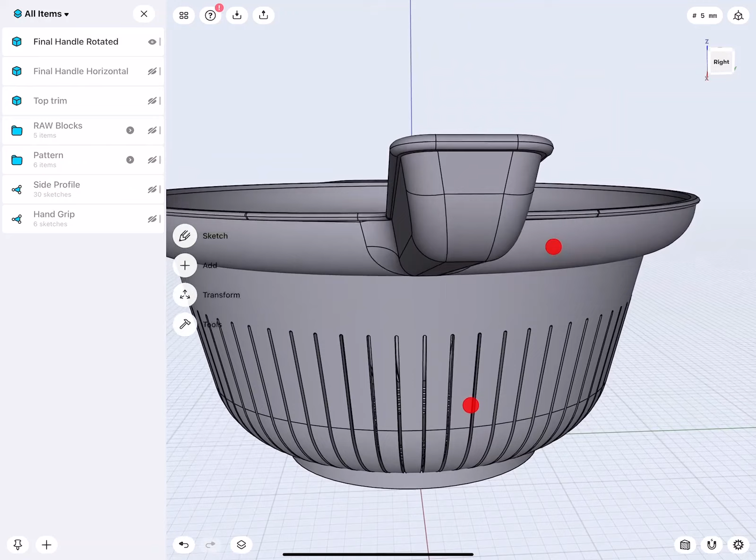Hello everybody and welcome to this tutorial, Advanced Surface Detailing for Strainer with Shapr3D. In this narrated overview, I will show you the process I used to model and style the strainer, with details like all those openings and adding a rim around the edge to stabilize the product. The file is shared, so please download it to better follow this lecture. As always, this session is filled with many interesting sketching and modeling tips and shortcuts. Now let's get started.

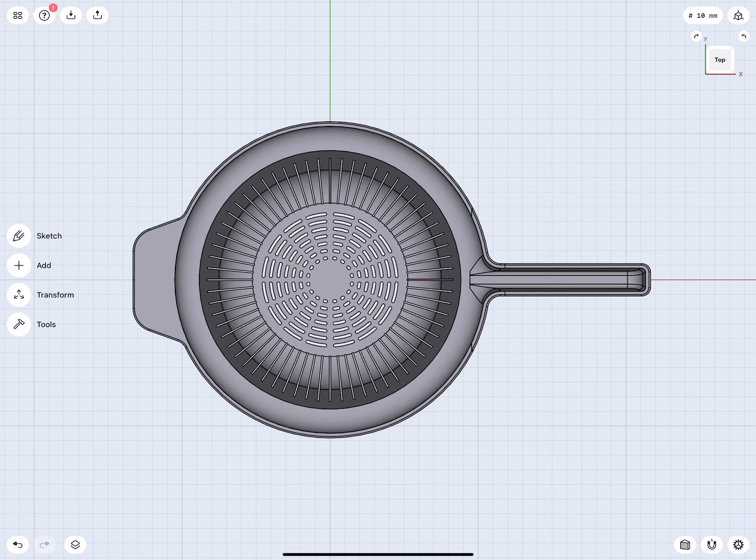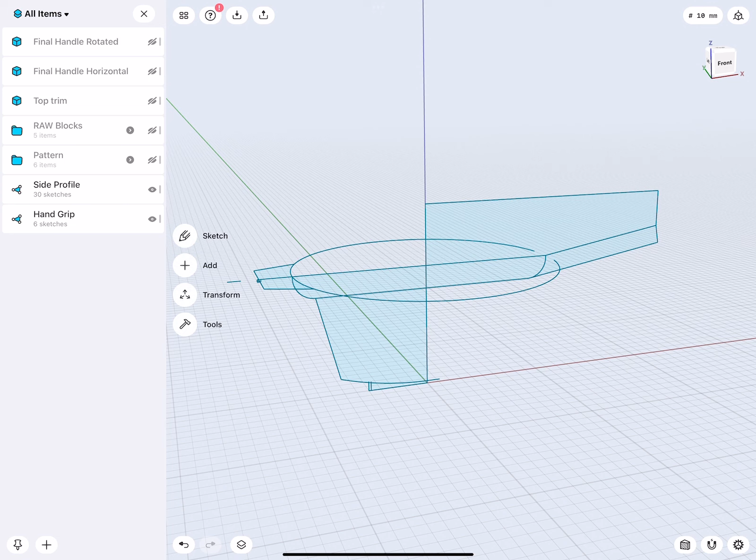Before we continue, because this video primarily focuses on the process I used to model and style the strainer, I'd like to take a moment to talk about how this design is set up. Let's hide this one and turn on these two sketches. Everything you see here is very simplistic, only what you need to model the strainer, because there's no point putting fillets and similar elements into the sketch. You can, but it just slows down and complicates the sketch, since fillets I can easily add as a modeling tool. So in general, I keep my sketches as brutal as possible.

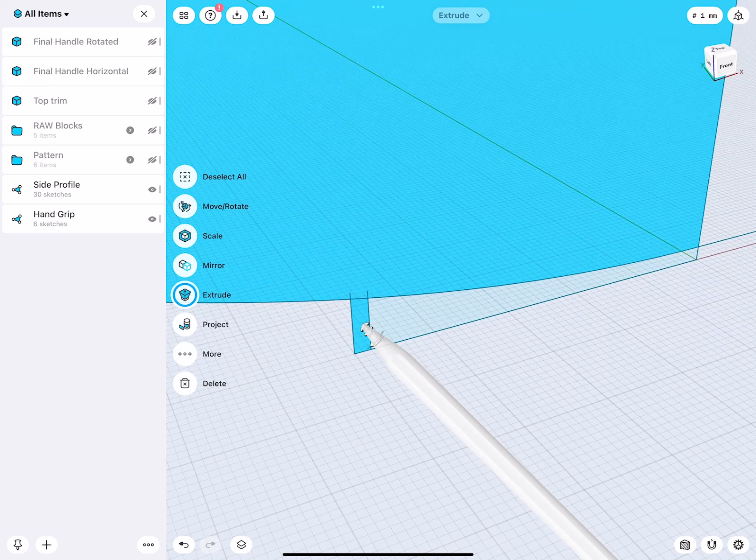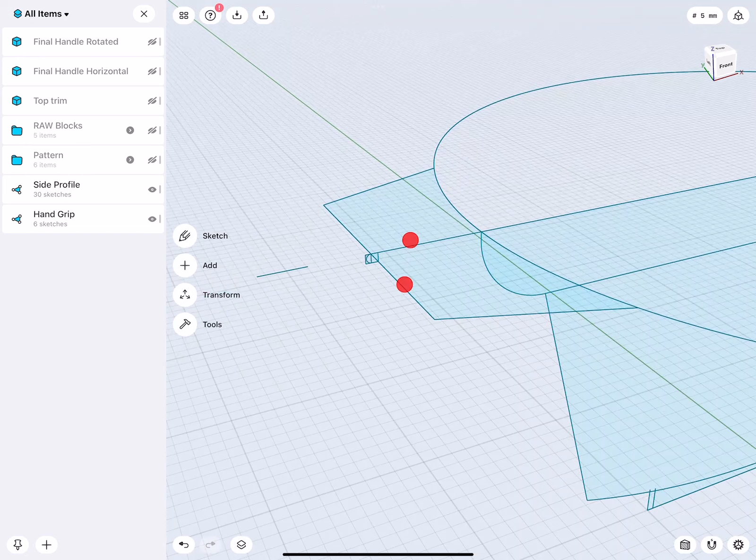You can see there's everything for the strainer, the handle, a horizontal handle, and the base. The base is very loosely sketched, the endpoints are loose, they don't even touch this arc. There's an interesting element here that will be cleanup geometry, which I'll explain. And here is a small sketch used later to detail and create a rim that goes around the strainer.

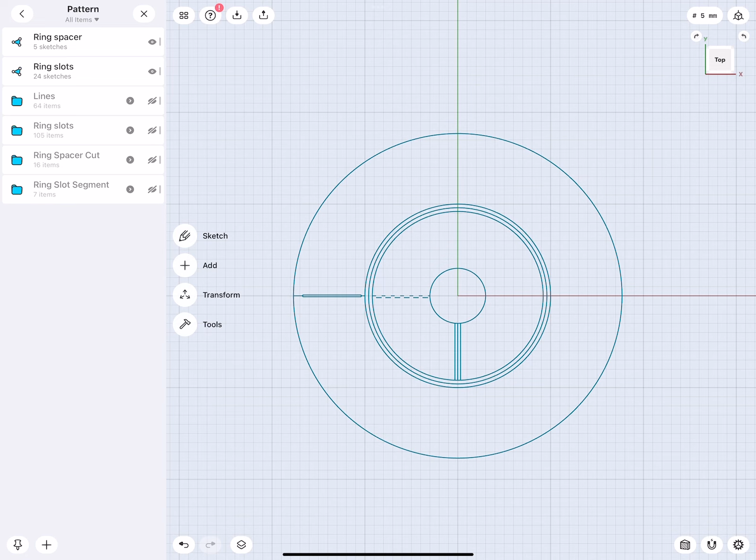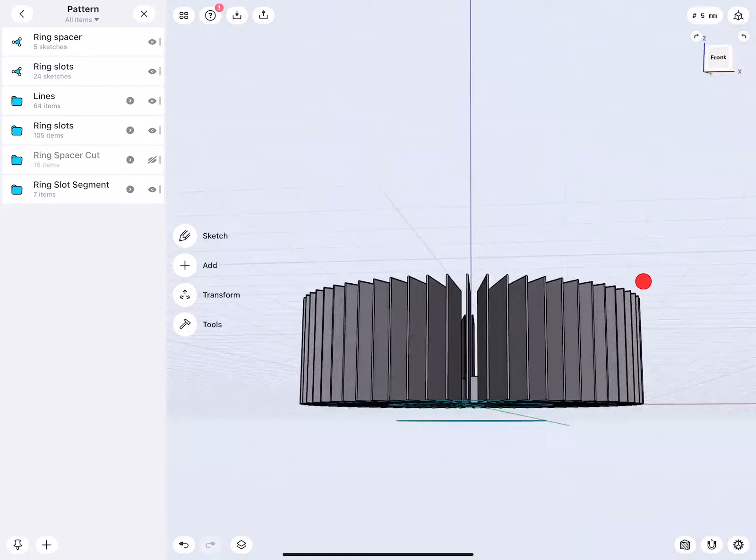Inside the pattern folder from the top, I created a sketch and projected in a lot of ring elements, based on the proportion and detail of the strainer base. There are more sketches in it, all used to create those slots and geometry which we use to cut all the openings into the strainer. You see they're also all pre-rounded, so once I cut into the strainer body, I don't have to do any fillets. Very good.

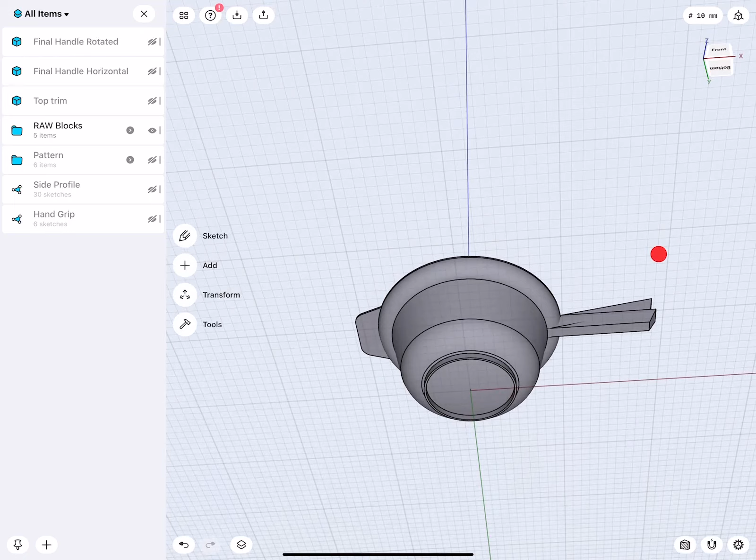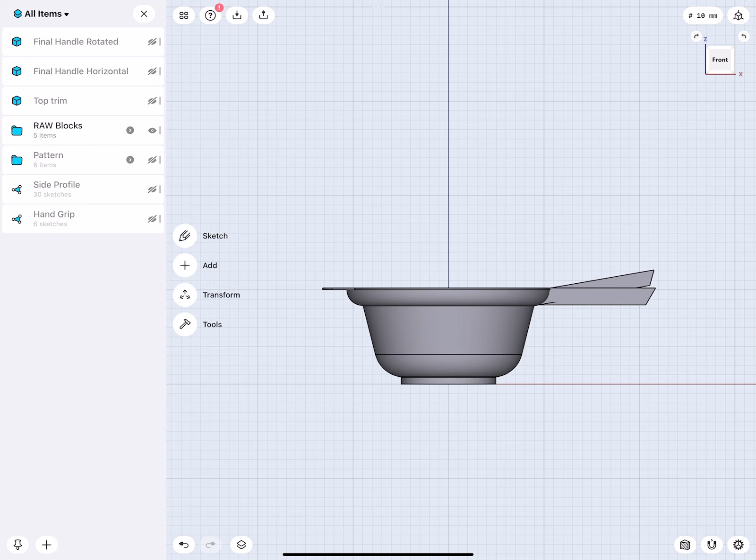Then I have one folder I call raw blocks. This has all the individual building elements: the base, the front handle, the rotated handle, horizontal handle, and the base part it stands on. The main reason I keep these elements as separate parts is, imagine something goes wrong and you have to go back to the sketch and start from scratch - that's very time consuming and irritating. Plus when you'd like to create variations, it's nice to have these building blocks, it's like copy and paste - you don't have to redo everything, you can continue at certain modeling steps inside your design.

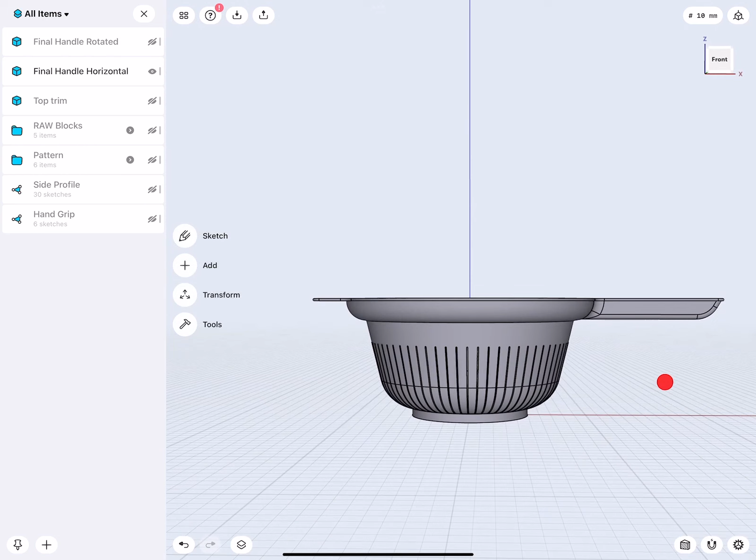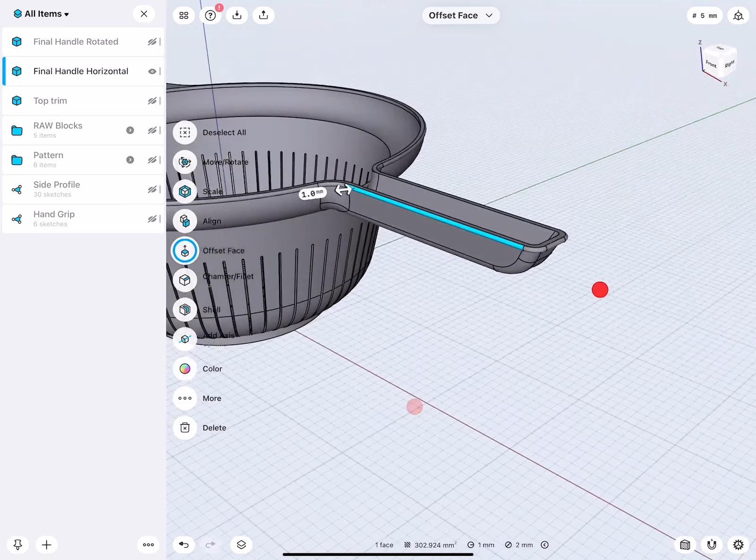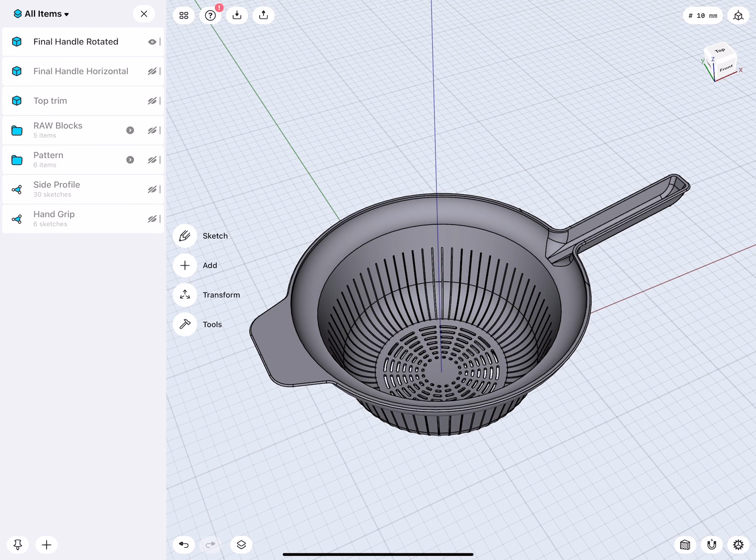Now there's also a final horizontal handle. I put this one in just so you can study it, it's pretty much the same design, just the handle is horizontal. For this I used the sweep command to sweep the sketch along the profile, getting a nice round swept element everywhere. But how do you do this when we have the handle that's rotated? With the sweep command we have one path for it to run across. Think about a roller coaster - it has two tracks because you have multiple directions where the wagon drives along. It's the same for sweep, so sweep isn't necessarily creating the result we want, and I'll show you how we can still model this with a different technique.

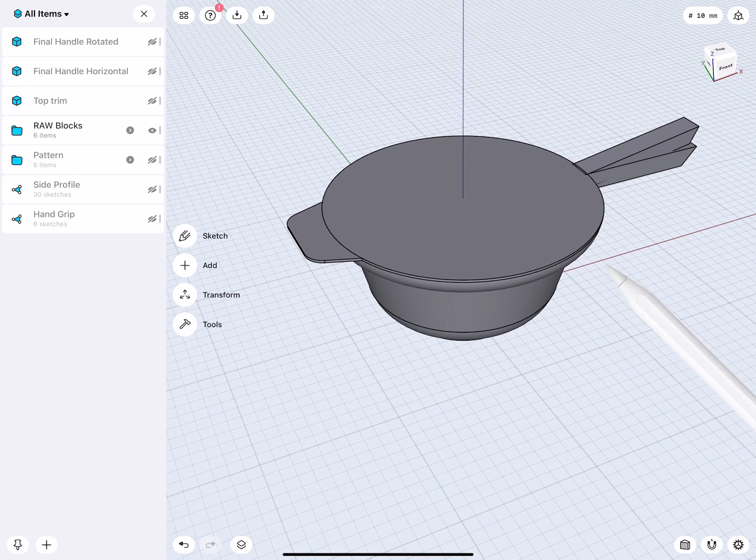So let's go into a 3D view. Let's turn on the raw blocks folder. I will select the top handle that's rotated and select the base, select union, keep originals, very good. Now I have to select the piece we just made - with a little bit of luck, there it is, just double tapping the object. Then we'll move this one out of that folder. Very good, okay, so beautiful.

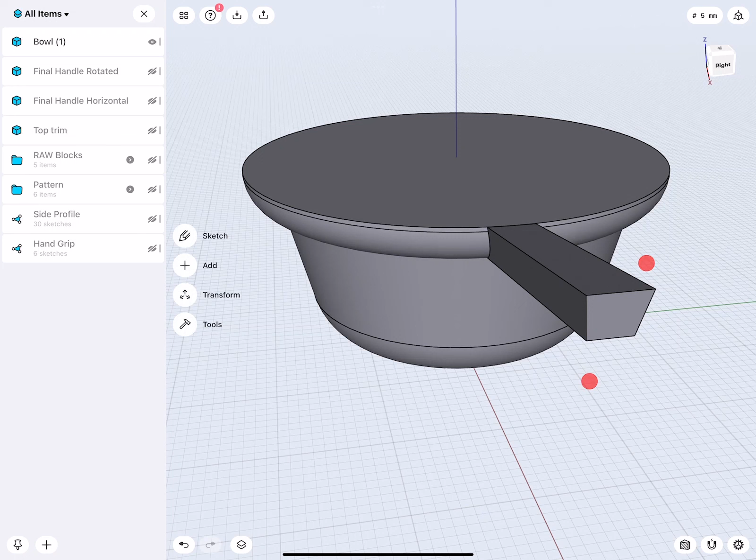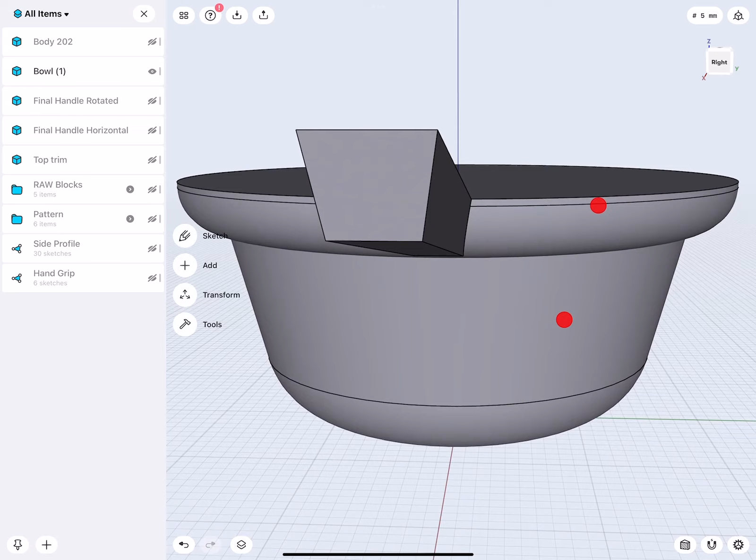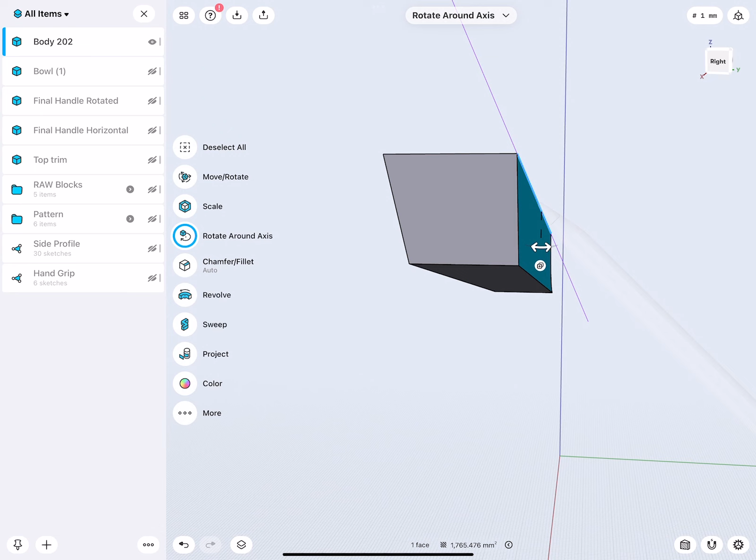Now looking at the handle, there's one really nice tip I'd like to talk about first. When we extrude this one out, you notice that everything here is very linear, but actually the handle has everything tapered. How did I do this? There are no more sketches involved - it's actually very easy, I didn't use any trimming, I simply rotated the faces. Select a face, select an edge, and rotate. That's all, it's super easy in Shapr3D. Okay, let's remove this.

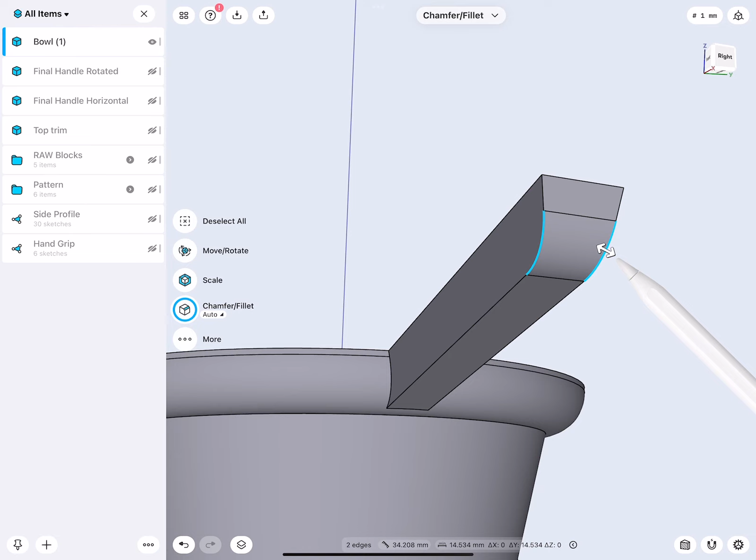Because the handle and the main strainer base are joined, we can go ahead and start rounding all our edges. We have to follow a particular sequence - first this one edge, because then I can nicely round those edges. And because now this is all rounded, I get these nice edges there too, and then I can round all this. You see, it's kind of like a tangent loop.

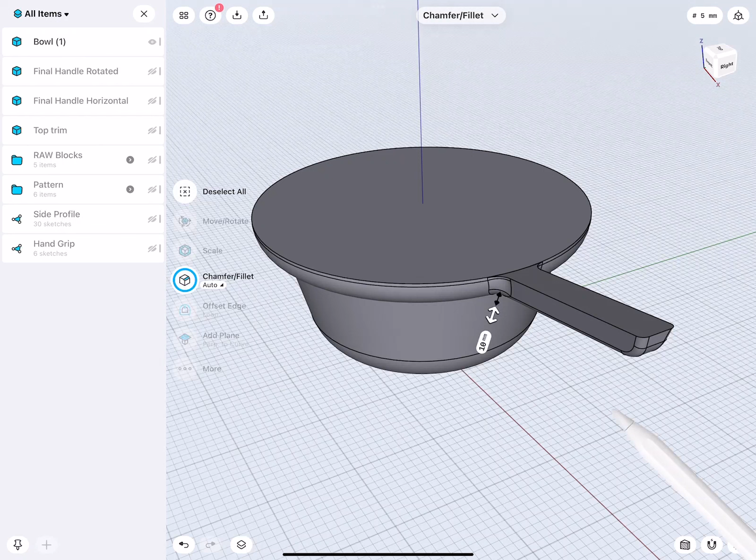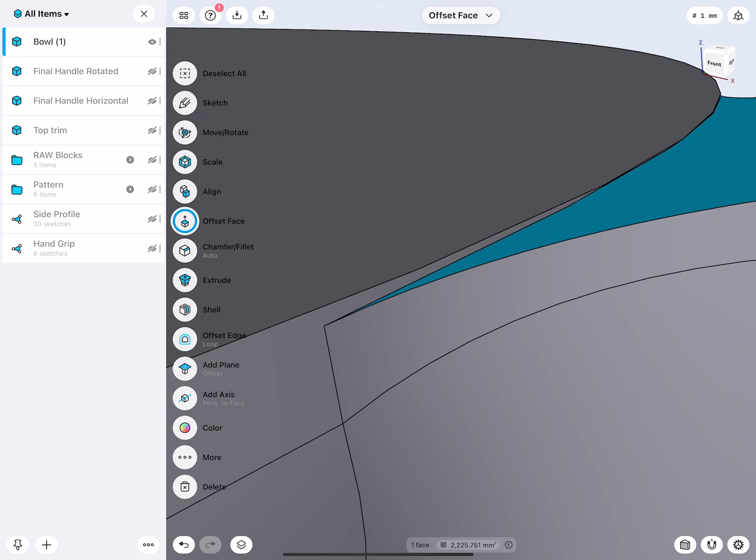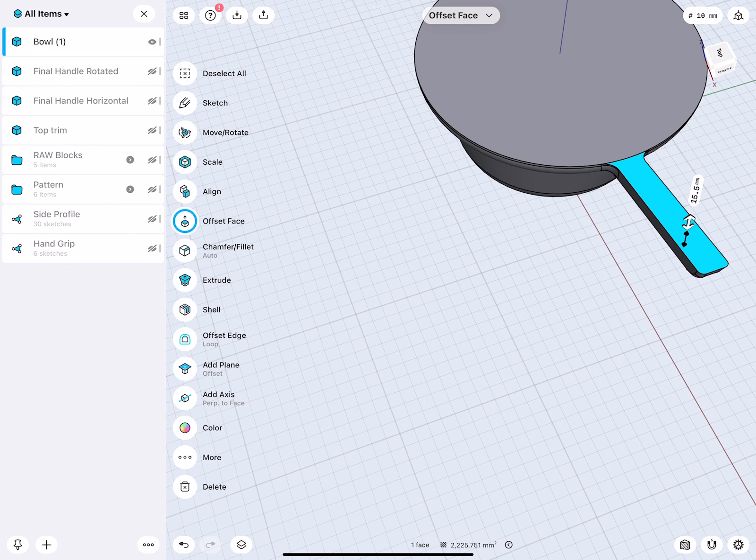Beautiful - not really, there's a little issue. When we zoom in, look at that, this is not good. We can see these lines are actually at different positions, they don't really meet. That makes sense because the strainer is round, as you can see, and the handle actually had a rectangular edge, so an edge can't really fit onto an edge, like a line doesn't fit onto a curve.

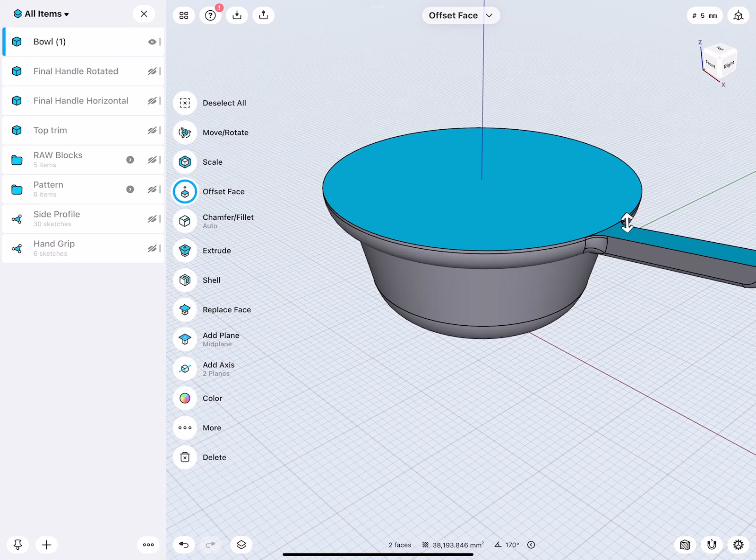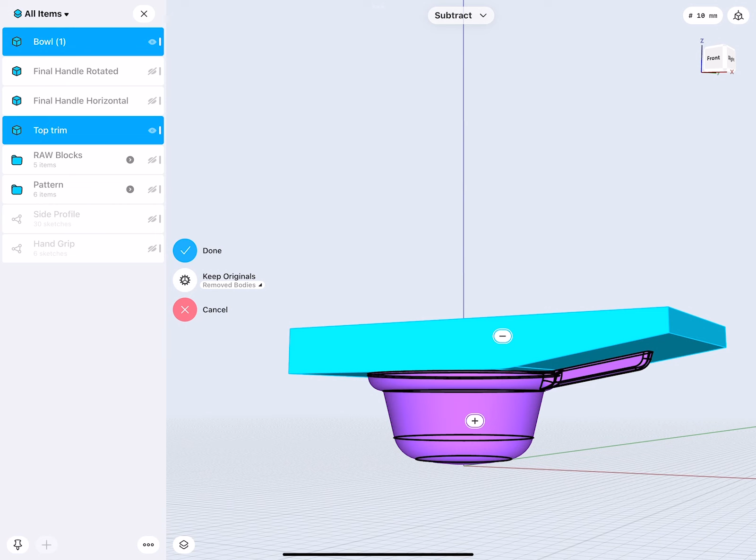So we also would like to shell this, but now this is not a clean, uniform face or surface. What do we do? Well, the solution is super easy - we just cut it clean. But first we extend it, that's also where we have this trim object here. Then this object, then this object, subtract, keep the originals - that's correct, remove. And there we are.

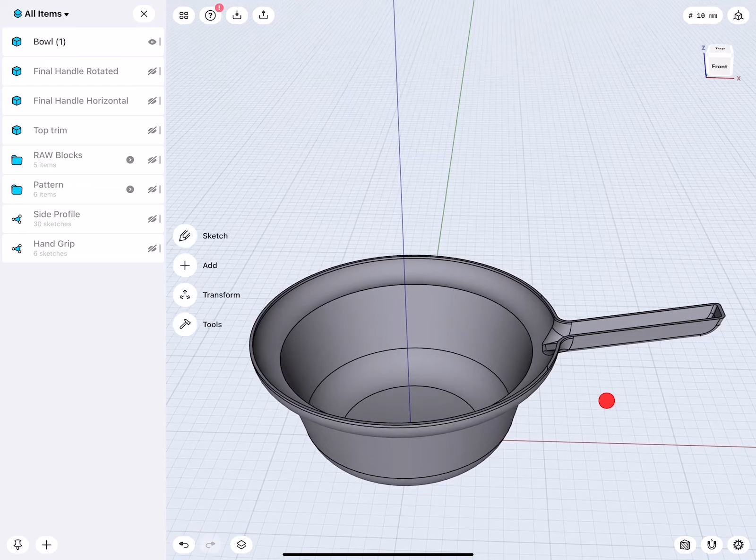Very good, now when I select these three faces and go to shell, I can shell it easily, nice and clean. And I'm going to call this one here currently bowl plus handle, so it makes sense.

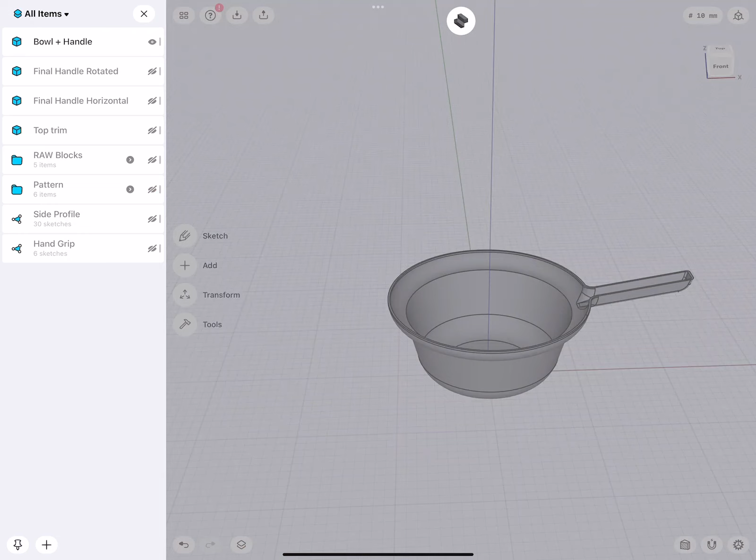You remember I have a folder with all those pattern elements in. You noticed opening it takes a moment, and that's because we have so many elements in there. What's really important when you model is try not to get distracted by tasks which aren't really important yet, or can even be a slowdown.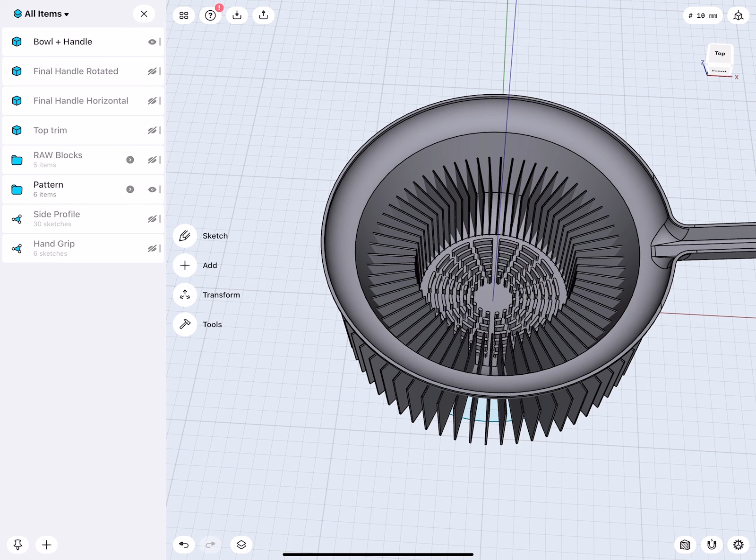Because there are so many elements there, chances are, it's just a rule in CAD, when I add these details to my bowl plus handle, possibly following commands might be slowed down a little bit. So I will not cut this out yet.

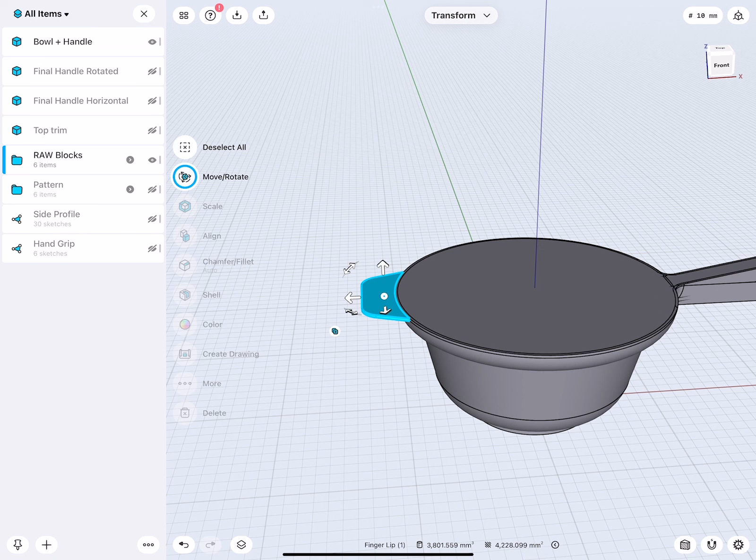However, when I go to my RAW Blocks element here, this is possibly now the next element I can add, because we have to work on the lip. So I make a copy, and then I move this one out. There it is. And I can join those together. There we are. Very good.

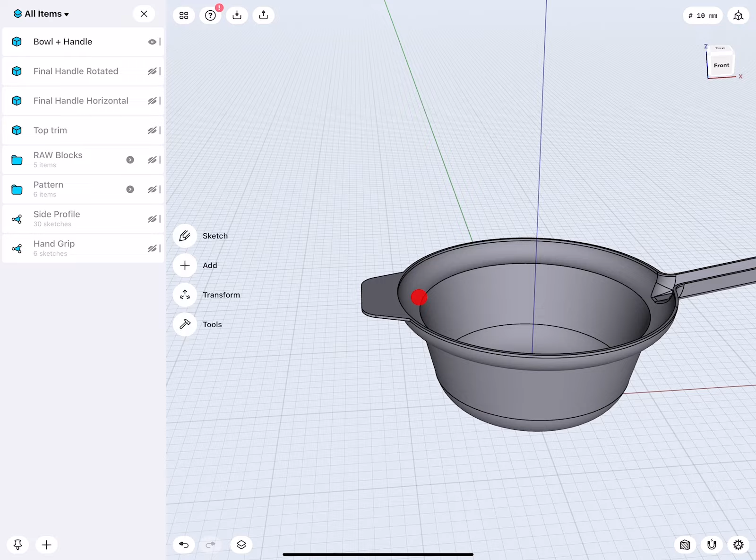We have two very sharp edges here. Let's clean this up. There we are. Pretty good. So now we are ready to actually do our sweep.

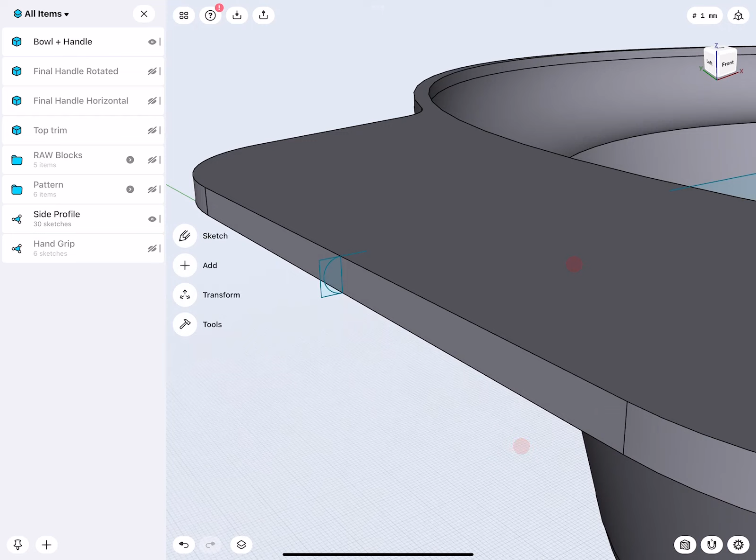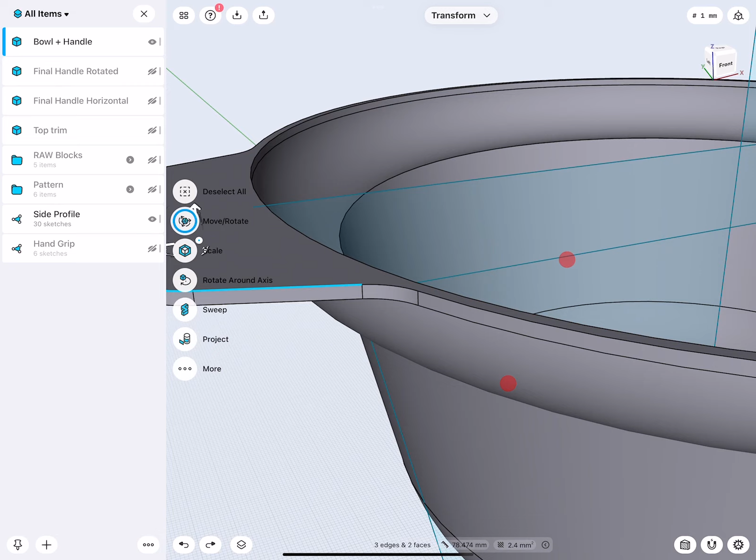Let's go back to here. Again, the way how the sweep works is we will select the profile we would like to sweep, and then we select the edges. You see, that's how easy this works. So I will have to select all these edges. When you do this, be careful that you really select all elements, and like here, don't overlook tiny gaps.

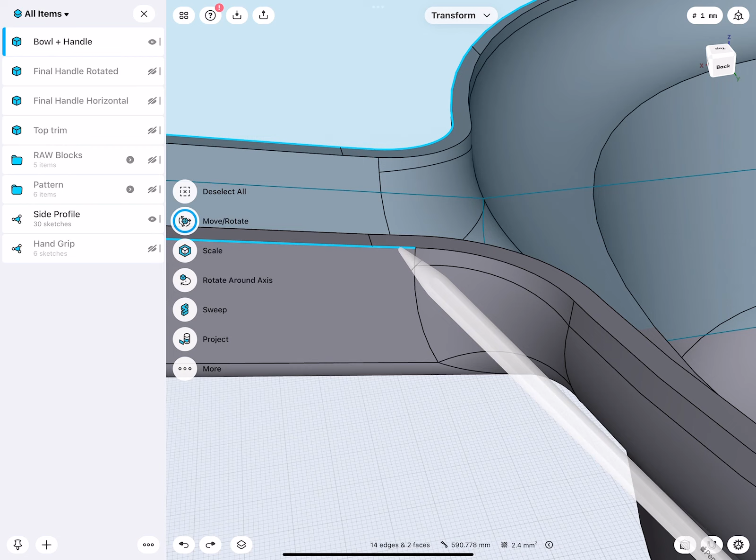And we are there. Sweep. Very good. Nice. Good.

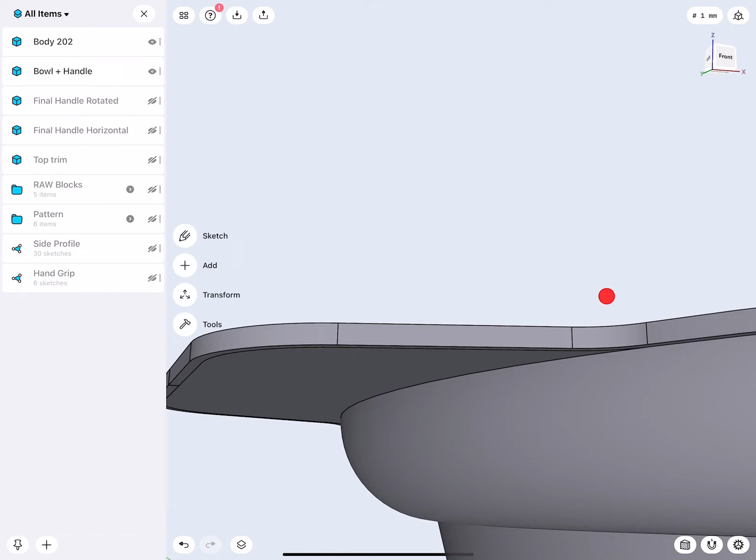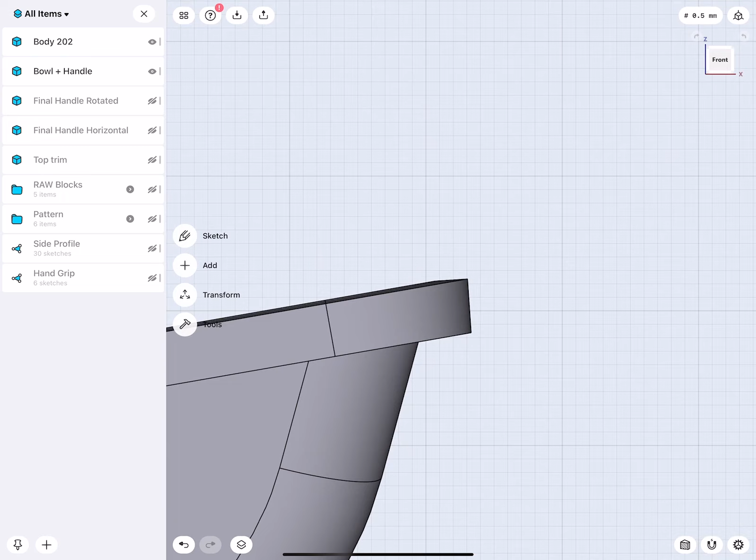So we take a look at everything here. This looks pretty good. And here, this will look okay. And when we go to here, yeah, there is obviously a cavity. That's normal, that's to be expected. When we take a look at the side here, we notice, oh, this surface is a little bit not lined up, kind of like with this surface.

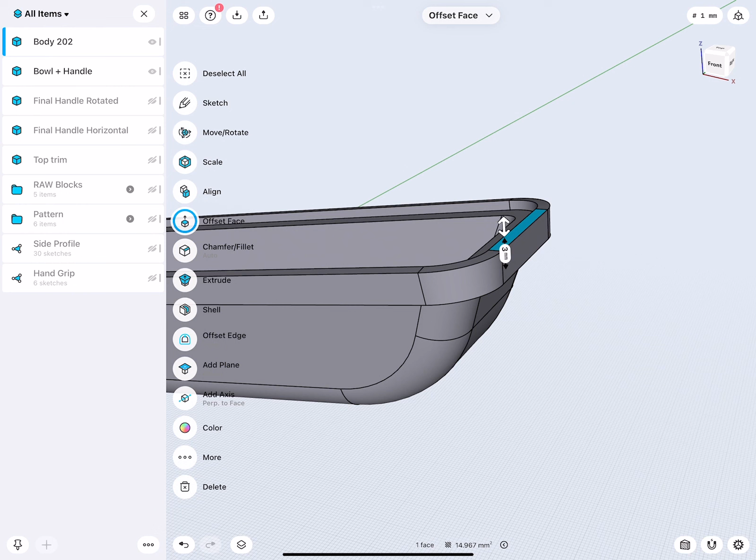So can we repair this? Yeah, actually super easy, and we do the following technique. We can select one face here and then simply extend this up. I just use a millimeter, not more. Then I still have this object.

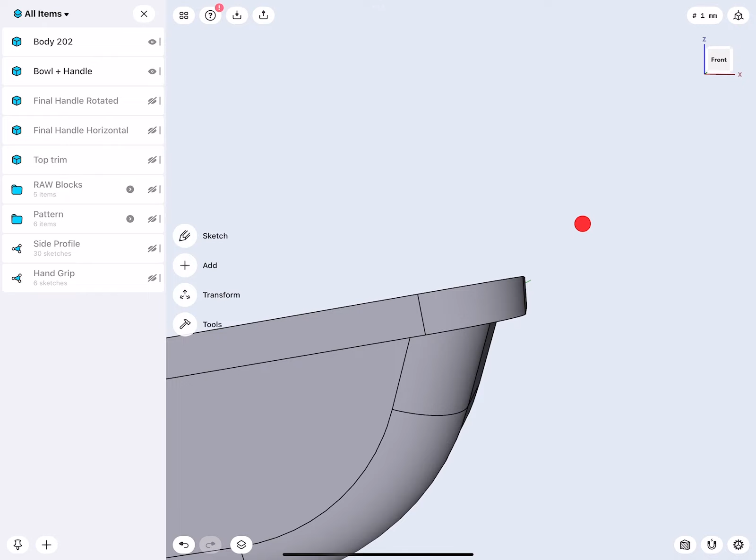I simply can use my trim object and clean the top area up. There. Now this is perfectly flush. So I just overbuilt it and cleaned it up.

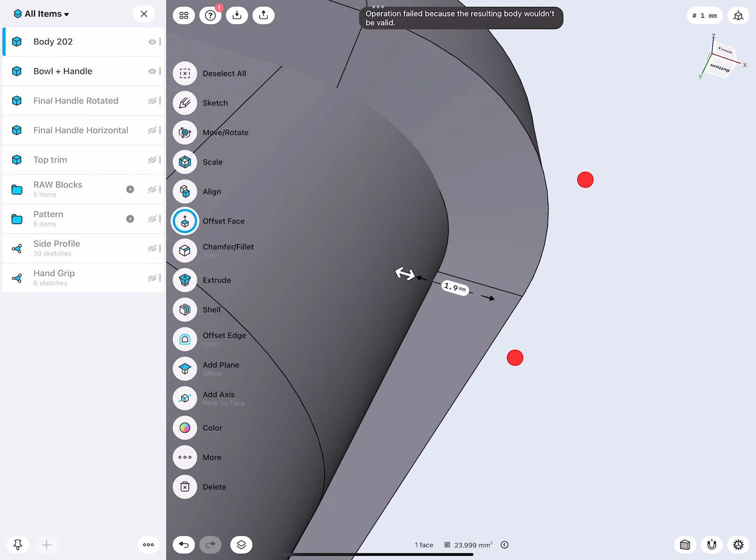I can select this and just be careful how much actually we bring this in. There we are. Okay. Let's hide actually this for the moment. I think this is kind of like also the max we have. Very good.

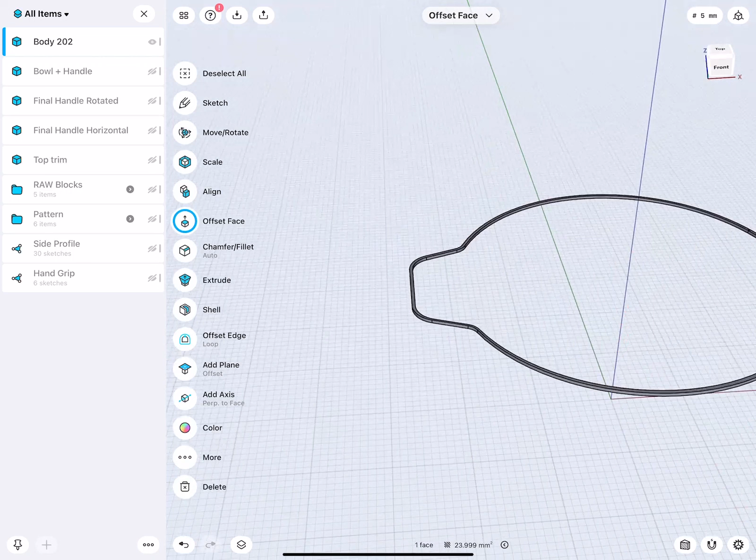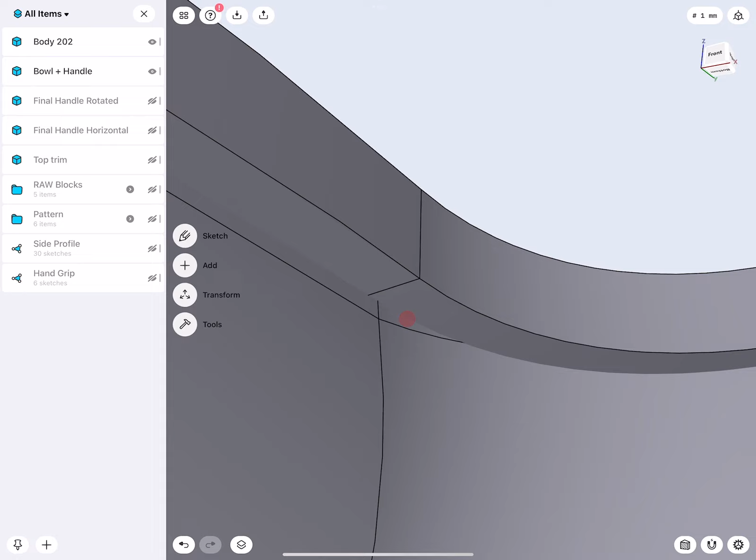Then we can do a look around. Does everything work well? This is all inside. So I'm looking for here if I see actually the edge of the sweep object to stick through. There is maybe a tiny one. We'll see how this will work out.

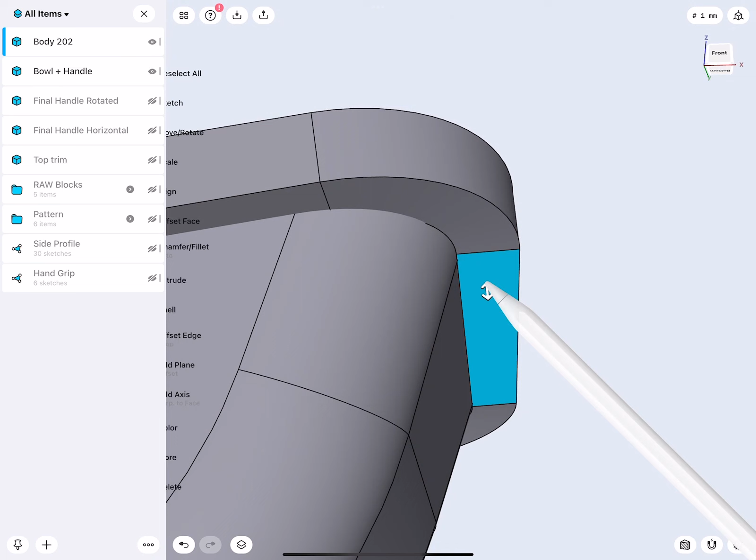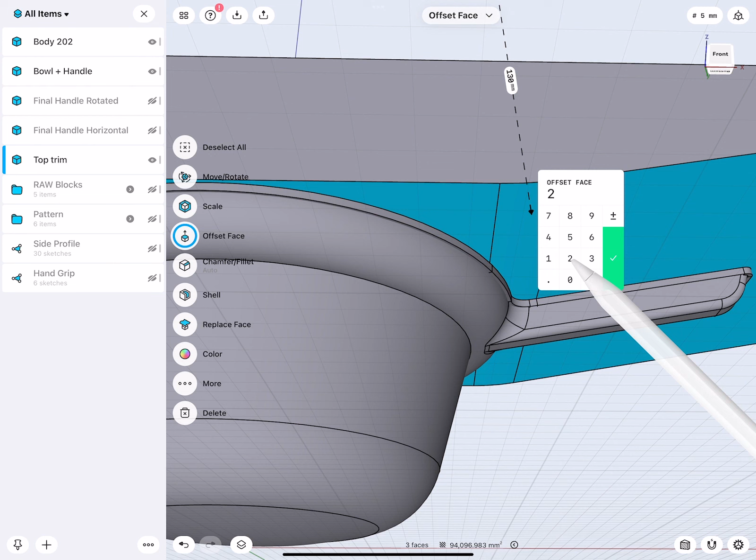We still want to clean up the bottom area. You see there's still a little bit of an issue. So also here, let's just extend it by 1 millimeter. Now when we turn our trim object on, we have to extend this by 2 millimeters. And you see, this one extends by 1 millimeter, because that's how much we grew it. Then we select our trim object, and this time we will select intersect.

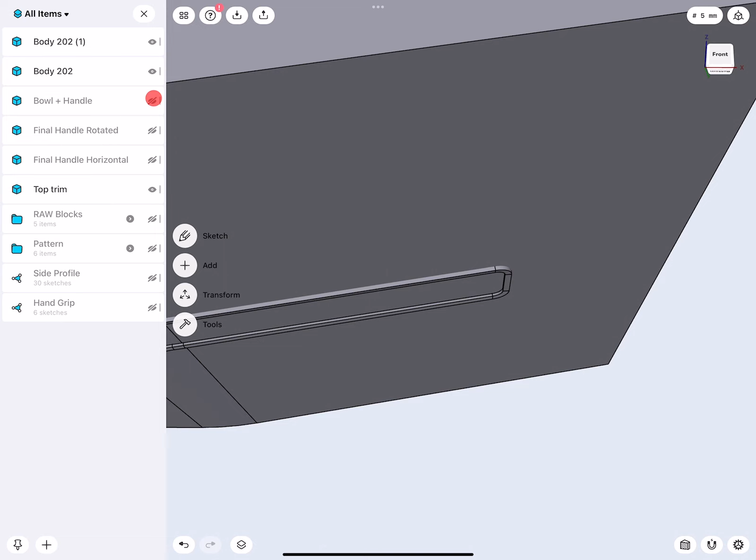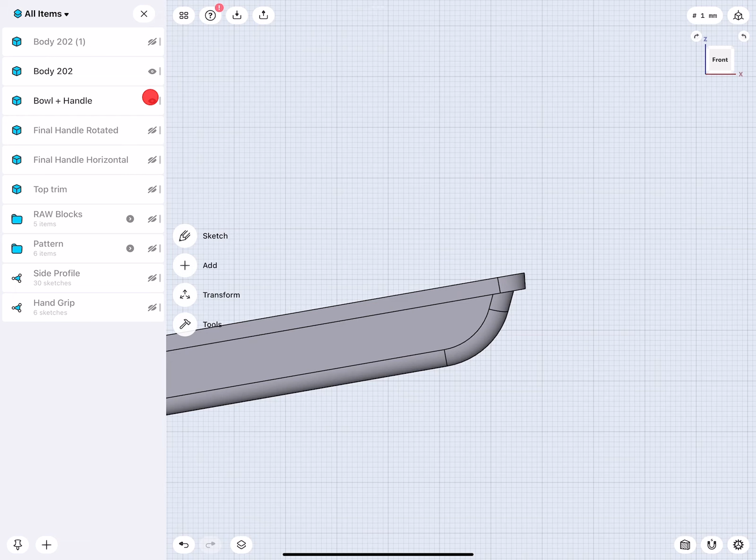And there you see we have the piece we wanted, and the piece here that's left. One moment, let's verify what we have. Very good. I do not know where this element came from. Very good. I might have made a mistake there.

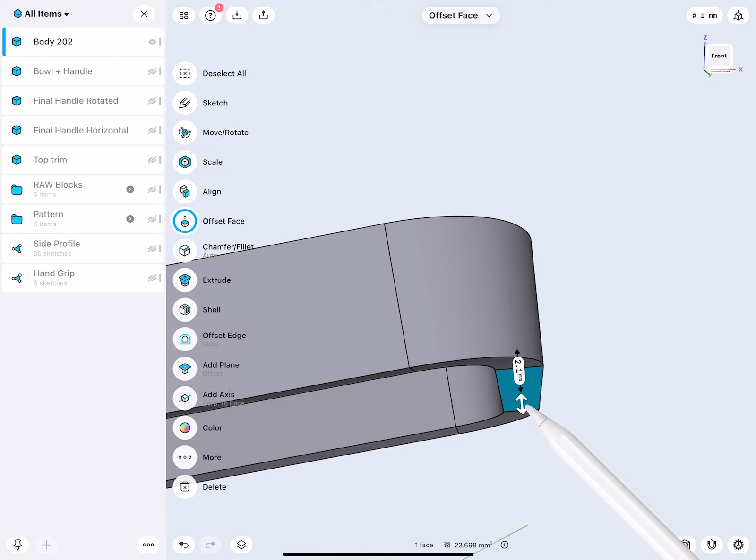So let's extend this and go by 2 millimeters, so it's just a tick bigger. Very good.

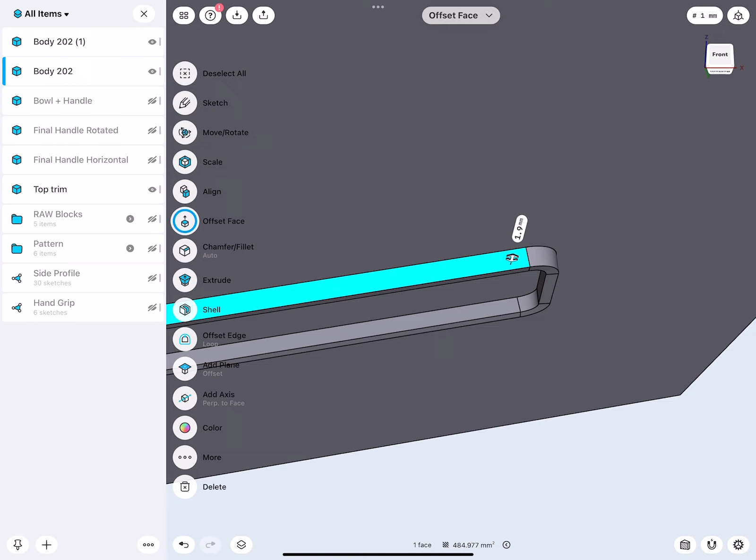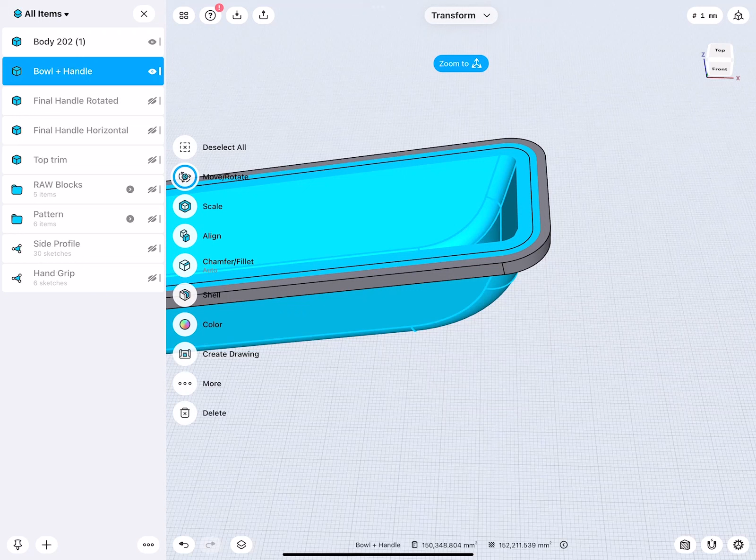There, okay. There you can see now how this also from the side is perfectly cut off. So this can go. And then these two can join.

Yeah, this looks actually nice and clean. You also see here one face. The modeling kernel cleans everything up quite well.

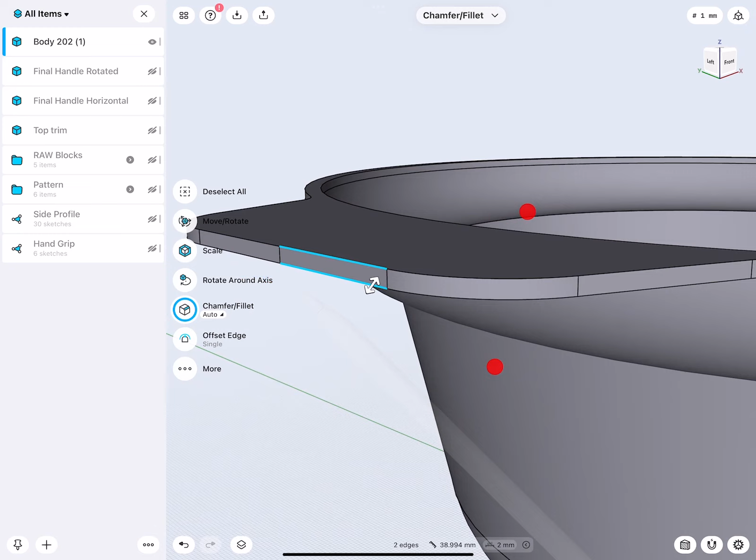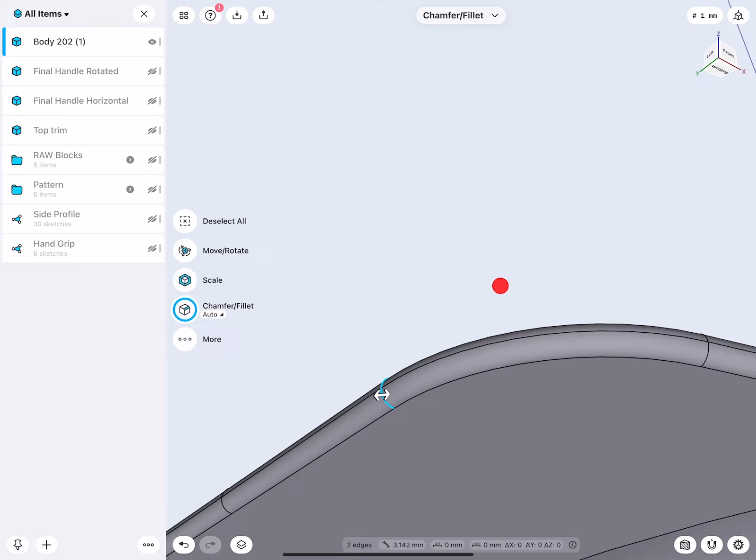And now the big question, can we round this? 1 millimeter. Because we have a 1 millimeter for the rounding, the thickness here is 2 millimeters. 1 plus 1 is 2, which means this actually is half an arc. Sorry, half a circle. So we have a perfect rounded element there.

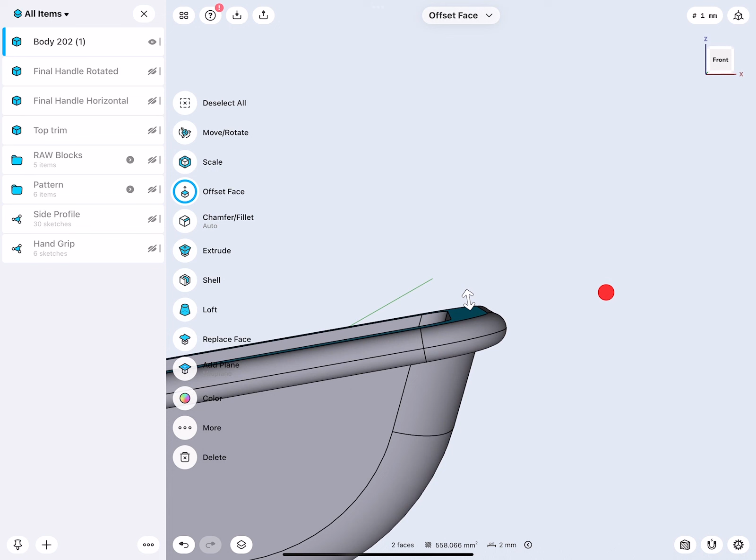And via the trim object, we made sure that all the faces here are really nicely parallel to the original face of the handle. So this is a beautiful result.

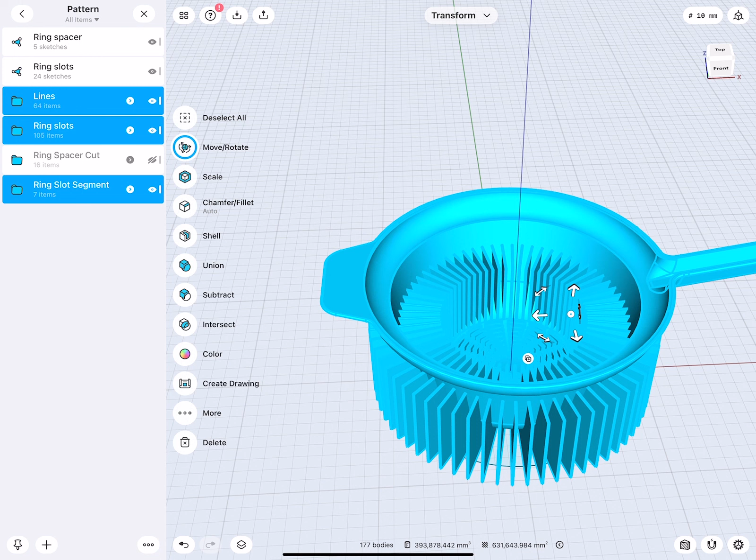Now we can actually go ahead, go to the pattern folder, select our strainer, then go into the pattern folder, select only the correct folders containing all these geometry elements, subtract, also here, keep originals, done. Let's hide this. There we are. Really good.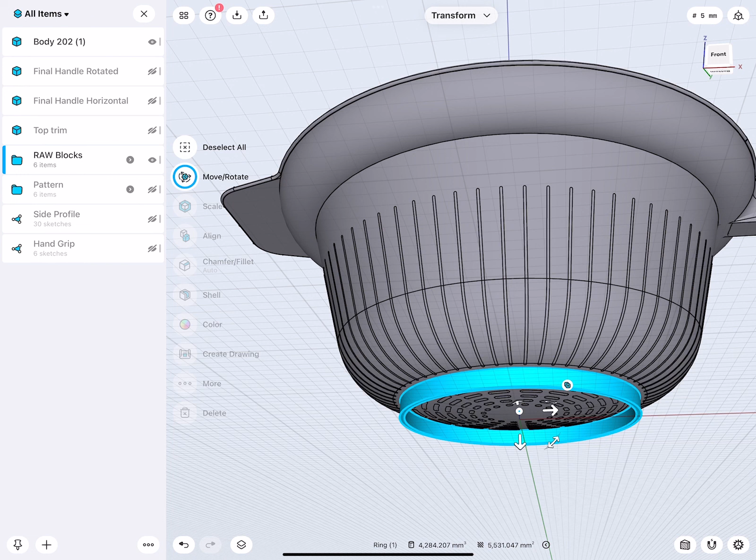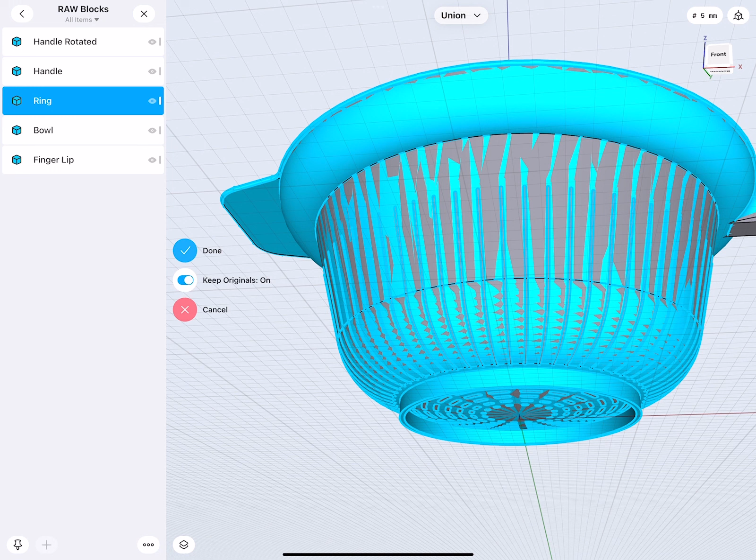Might be too difficult to select the correct piece. Actually, I just made a mistake when I said this is too difficult, because I just realized I can select from here my target object. Here is my ring. Join, keep the original. Very good.

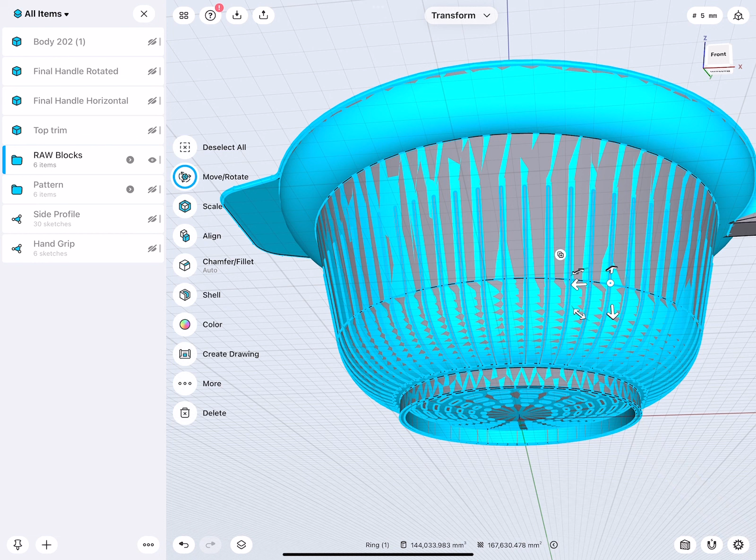Now you see now it takes a moment to add the ring there to it. And you might then ask yourself, oh, where's the other element? It is actually there. This is the part with the ring added at the bottom, and this one we can remove. Very good.

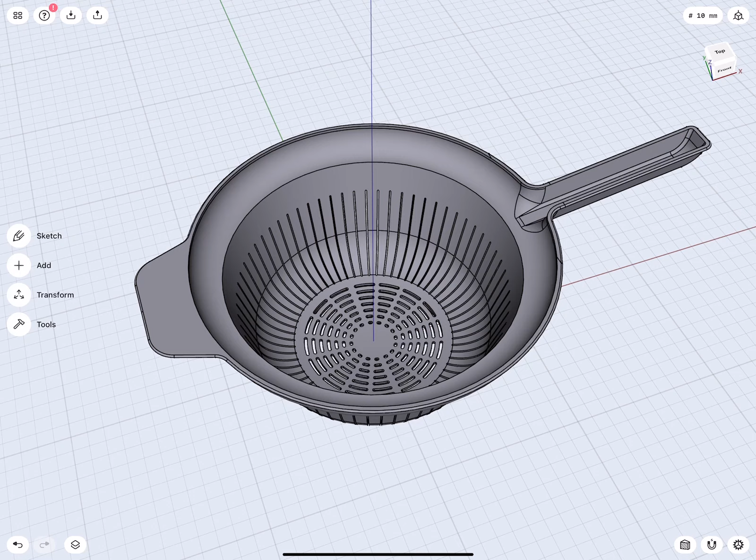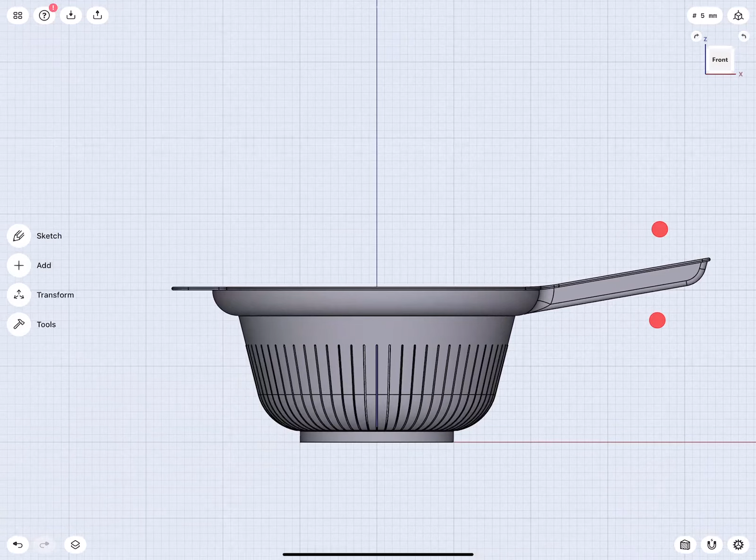So there it is. That's how you model this strainer with all these details in the center for the opening, how to build this handle that is nicely tapered and has well-rounded edges, and then how can we add this beautiful symmetrical and even thickened lip that goes around the object edge, including the angled handle, with also having like an even material thickness, and then just a perfect filleted edge resulting into half of a circle.